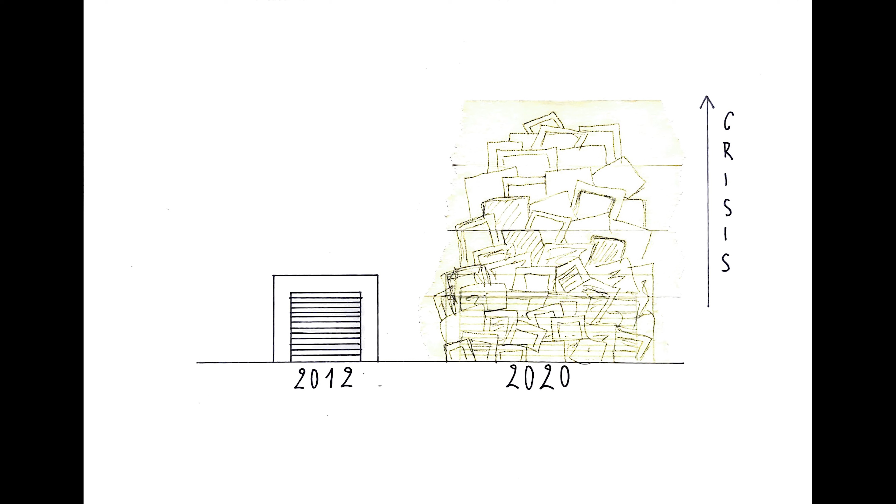The same problem is visible in the shopping industry. Even before the COVID-19 crisis, there was already a lot of vacancy in stores. It has doubled since 2012. Data from research agency Locatus show that there were 2,570 vacant retail premises at the beginning of 2020. Since the crisis, it will only have increased. This could be due to e-commerce and the aging of the population.

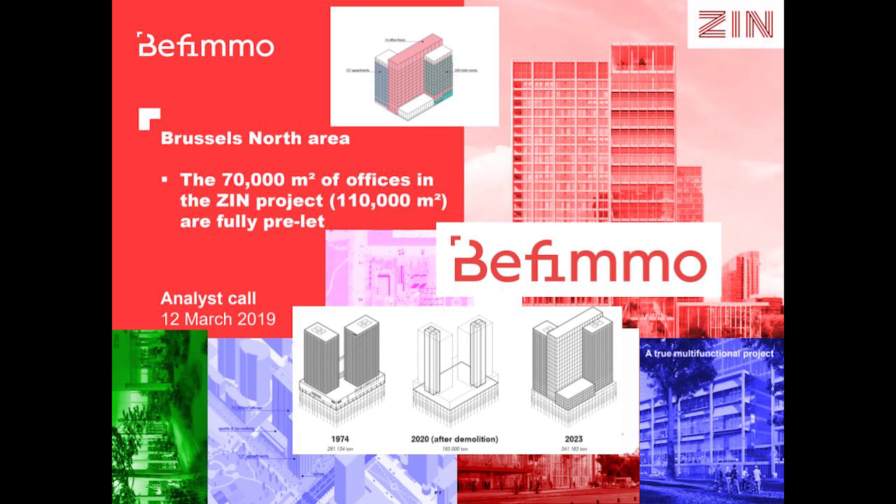Meanwhile, Befimmo is rebuilding the WTC towers in the Northern District. The project called ZIN will maintain 70,000 square meters of offices. The other 40,000 square meters will be filled with hotel rooms and apartments. The project will cost approximately 375 million euros.

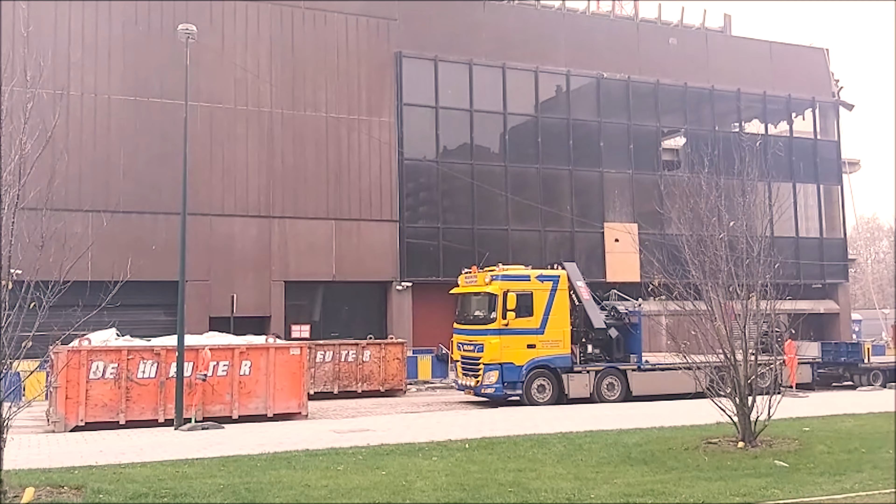What if Befimmo can't finance the project anymore? What if the demand for hotel rooms and new office spaces stops?

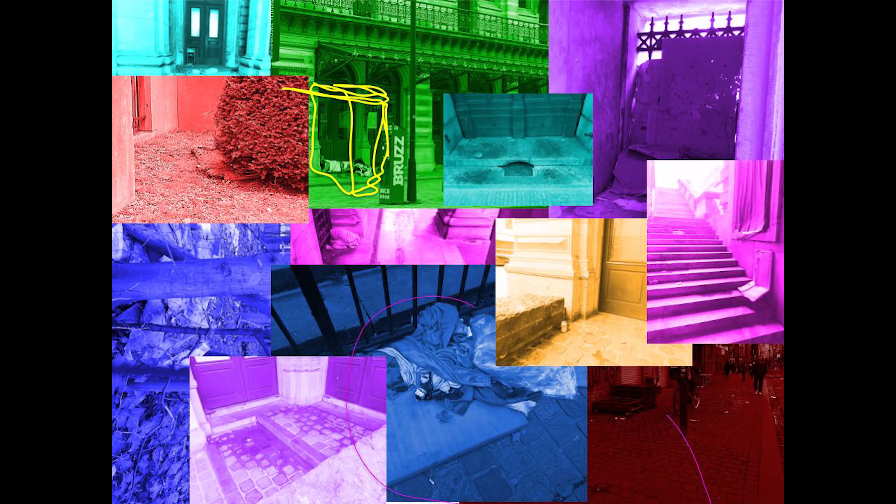At the same time, a lot of users of the city of Brussels don't have their own property. According to a counting in 2018, there are more than 4,000 persons in Brussels who have no home. This has doubled since 2008.

This is John. He is a 47-year-old male and has been homeless for 1 year.

I'm John. I became homeless after divorcing my wife. It was a tough time. I wasn't myself anymore and lost my job. I was too proud to ask for help, but I really didn't know what to do. I slept on benches in the park, in stations and in caves of buildings. After living on the streets for more than 3 months, I finally asked for help.

Now I'm living in a big homeless shelter. But I still feel homeless, because it is still not my own roof I am sleeping under. I like being in the same environment as other homeless people, because they really understand my situation. But I really miss having a place for myself. I want to be alone sometimes. Just sleep a bit without being talked to.

The last few years, more and more projects in the context of homeless people, like for example Woundbox, pop up. But what if there can be a project that combines the problem of housing of homeless people and the vacancy in the city? What if we can give the unused public spaces to people who can really use it? And retake the city. The project will contain 3 cases.

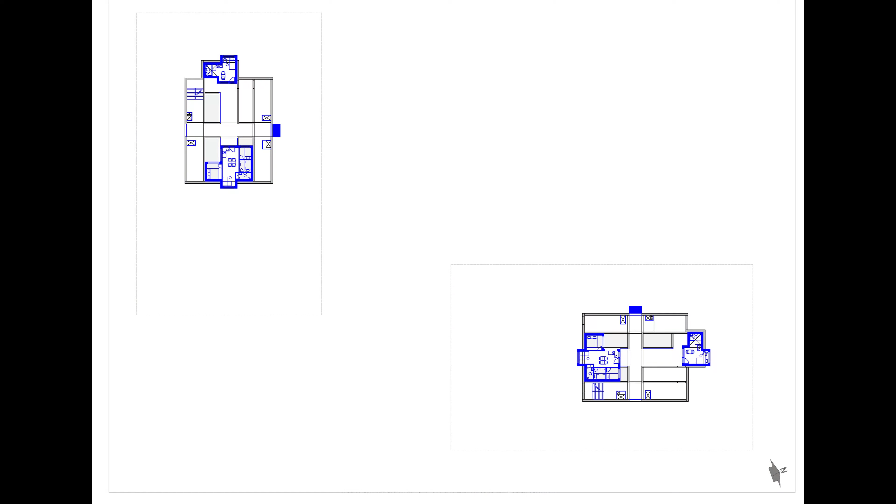The first will be the WTC buildings. We start from the assumption that the construction will not be carried out due to too small demand. As long as the construction does not start over, the modular buildings will parasite the construction site. We will fit the houses into the remaining shaft. These houses will be indoor spaces, but the shaft itself remains outdoor.

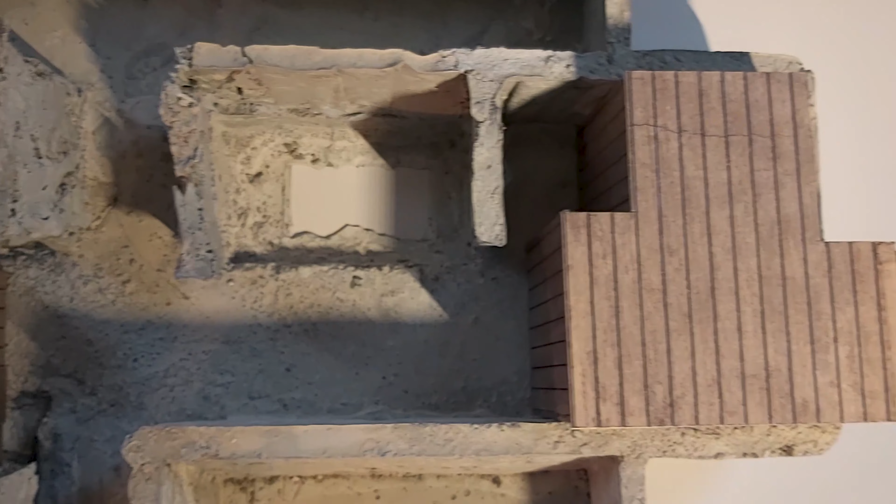The houses will be built with eco-friendly materials. Wood will be used as structure and covering, and sheep wool as insulation. Also, the new stairs that we add to the building are made out of wood. As an elevator we use an outdoor one used on construction sites. The houses will be as small as possible so they are efficient to live in without using too much material.

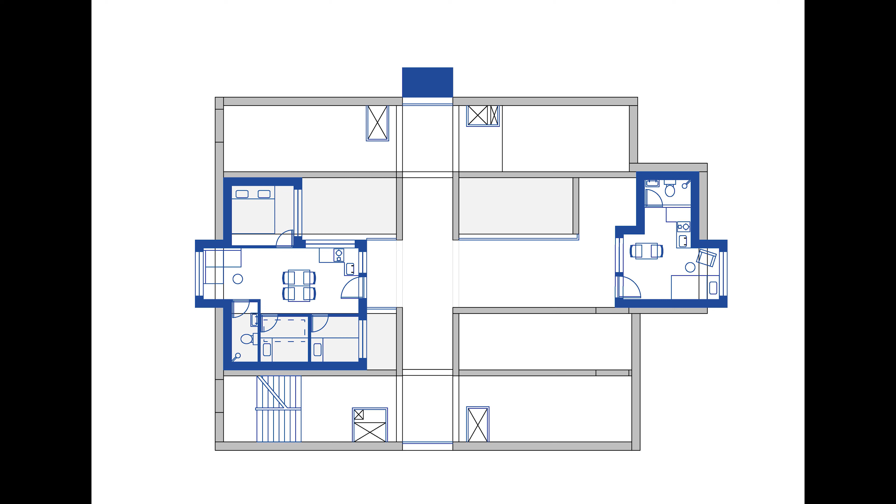Family houses will have a maximum area of 40 square meters, and single homes will be approximately 20 square meters. When the project ends, everything can be reused.

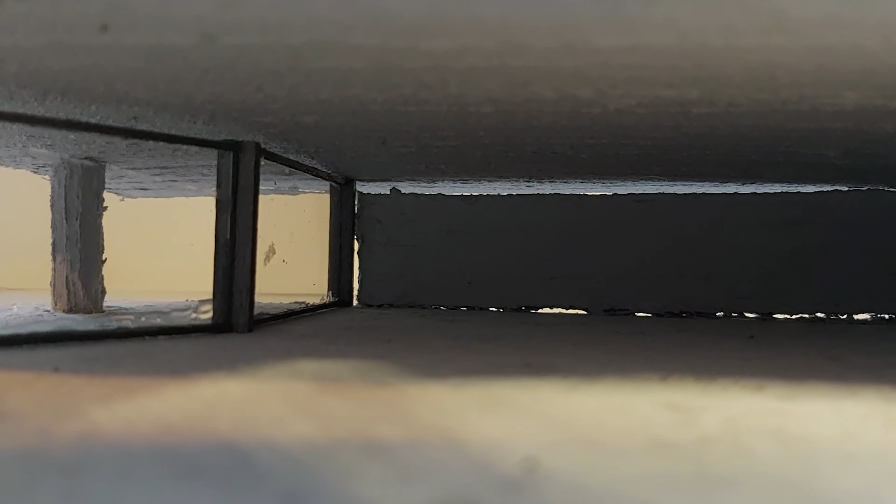The second project is located in the shopping mall City 2. Because of the upcoming e-commerce, more and more stores become vacant. As a result, we can clear almost an entire floor in the building.

The project will take place on the lowest floor. On one side of this floor, there is the passageway to the metro. Because of that, we will occupy the other side of the floor, so there won't be too many passengers and everyone can maintain his privacy.

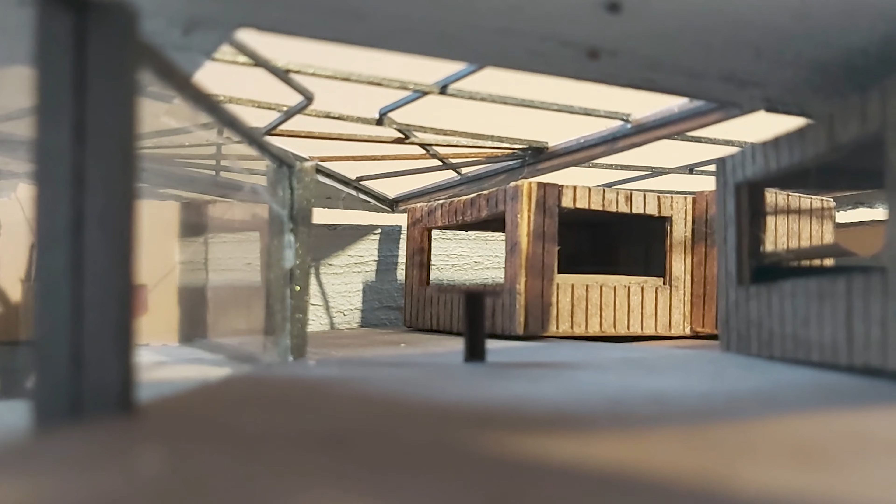The separate shops on this floor will be filled in with the same housing system as we used in the shaft of the WTC. In this way, we create different small villages.

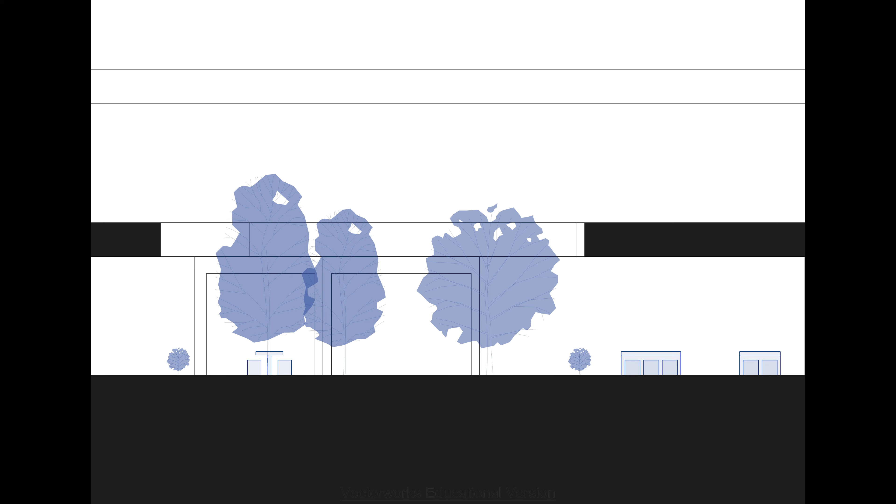In the shops we will raise the floors, so we can adapt a mechanical ventilation system to the separate houses. The open space in the middle of the mall will be more public, so there is a possibility for socializing and communication. We will plant trees and place benches.

Because it is on the lowest floor, we will remove the floor of 3 shops next to the entrance to the Rue Neuve above our project. In this way, we can provide natural light for the houses at one side of the floor. The light at the other side will come in through the existing hole in the floor meant for the stairs.

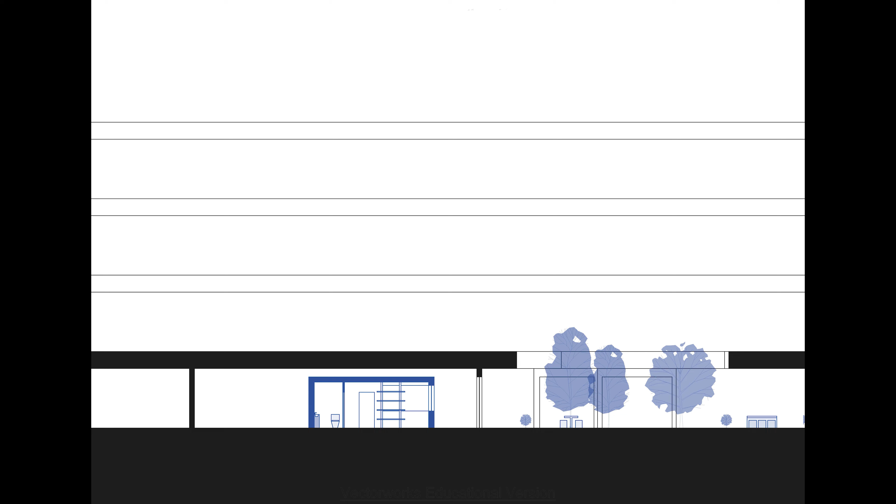Meet Lisa. She is the owner of a store in City 2. Hello, I have had my own store in City 2 for almost 7 years now. I love having my store here, because it feels like the perfect environment. It is always busy and a place where everyone can come.

With the new project, I'm a bit concerned that the homeless people will scare my customers or that they will destroy the interior of the shopping center. And what if they will be begging for money all over the mall? I'm just scared of losing customers.

We understand the concerns of Lisa, but they won't be necessary. Our company will assist the residents of our project very well, and they will get all the help they need to find a job and a permanent living. They will live in our houses for the period that they need to obtain that goal. This project serves as a springboard to the real society.

Besides that, we will provide a counter at the beginning of the open space we talked about earlier, and in this way everyone can report his or her concerns.

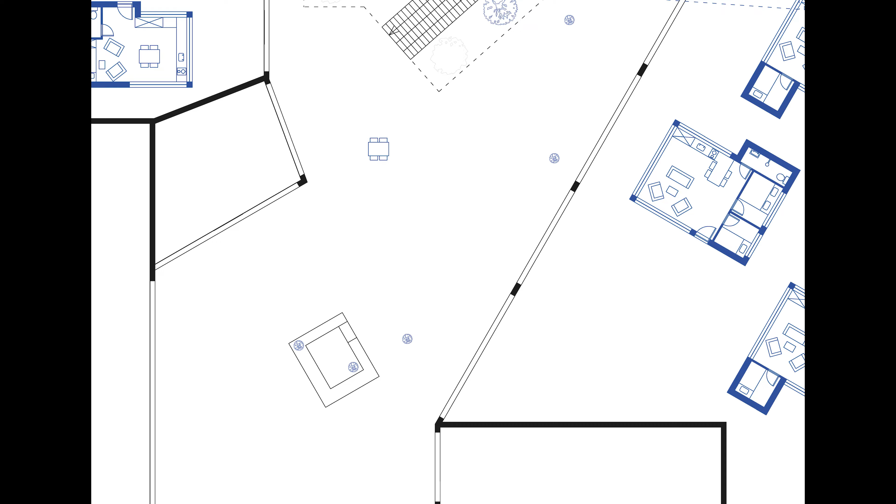As a third and last case, we parasite a building of the Flemish government. The government wants to get rid of 40 office buildings because of the upcoming telework. The project will take place in the Herman Teirlinck building. This building is still very new, but suits our project because of its accessibility.

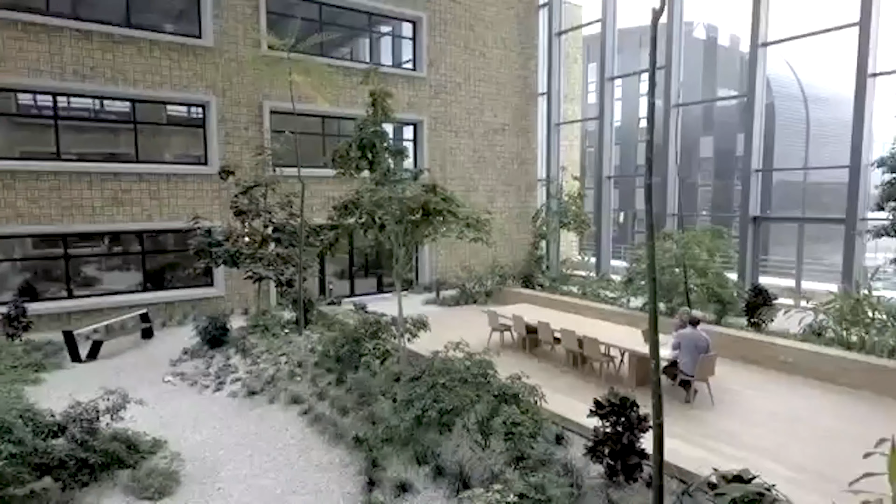It is very open and contains a lot of public functions on the ground floor. On the first floor, the meeting rooms are located, which you can reach by the monumental stairs. The higher floors are filled in with office spaces.

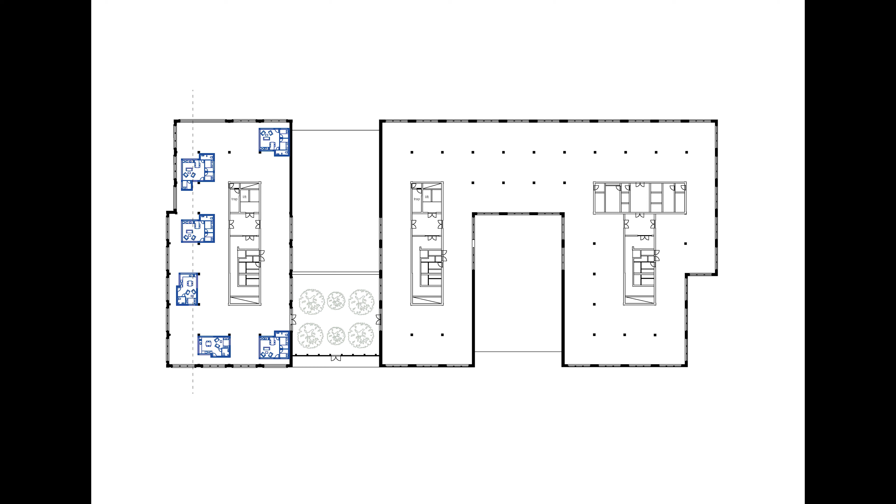We will occupy a separate part on the second floor for our project. Access to the floors is only possible with a key card. This way privacy is always guaranteed for everyone. The houses will follow the grid of the existing columns.

For ventilation we can use a natural system. During summer the big windows can be totally opened, and in this way we create an indoor-outdoor space. During winter, the windows can still be open, but if that doesn't provide enough fresh air, we can still count on the mechanical ventilation of the building itself.

With these projects we will combine the lack of space with the oversupply of it. And the city will be retaken.